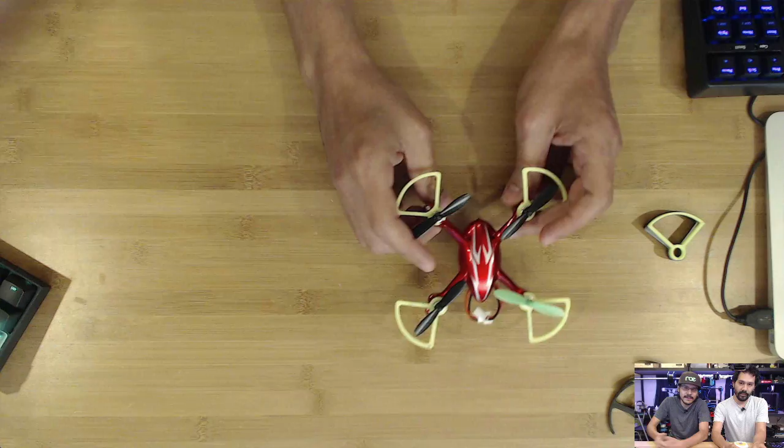Okay, let's start off with what are you prototyping? Pedro, what is this? Last week, you got some drone stuff. This week, update to the drone project. Yeah, so last week we were testing out some prop designs, and we were testing out different filaments to try to achieve nice, rugged, reliable prop guards that were pretty durable and didn't break so easily.

So we started off with the carbon fiber from Proto-Pasta. One of the things that we realized right off the bat was that it was a little bit more brittle than PLA in some cases. Really? A couple of minor crashes really wrecked this. So it actually forced me to redesign the prop guard into something a lot simpler where it's just grabbing onto the motor instead of having this little part here that connects to the bottom. So we cut all that out.

We cut all the fat here where it easily broke, no matter how thick we made the little support here. So we just split that up. We're able to make that a little bit shorter, skinnier, and still maintain the strength.

So we had some XT filament from ColorFabb, which is the copolyester PLA filament. You have to print it at 250 degrees, and it definitely was less brittle than the carbon fiber. It had a little bit more flexibility, but it still managed to break even on crashes that weren't so hard. And it turns out it actually weighed 0.1 grams lighter than the carbon fiber. Oh wow! So the carbon fiber here is reading at 1.1 grams, and the XT stuff is reading at 1 gram.

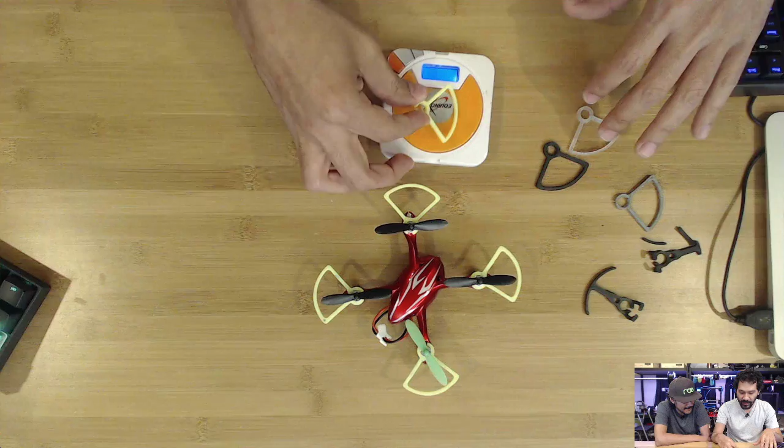And ABS weighs 0.6 grams, so it's almost half the weight of the carbon fiber or the PLA. We were saying last week that about a gram takes about half a minute away. So you're saving about maybe 30 seconds of flight time.

Flight time. So very durable, lighter. The only con here is that you need a heated bed. Yeah, but because of how small this is, it takes about 5-8 minutes to print. And a lot of printers also offer a heated bed upgrade. Oh, okay. You're not completely out of luck. So you might be able to print this on a non-heated bed with, you know, hairspray or a glue stick. So that is the tests on making some durable, lightweight prop guards.

Now take a look at drone. Now tell me a little bit about which printers did you use for these. Somebody was asking if you could print carbon with the Printrbot Metal. Yeah, so all of these were actually printed on the Printrbot Metal. The ABS was actually printed on the Orion Delta printer. Okay, that is one of the better 3D printers that we carry in the shop that do have a heated bed. So it came out really well on that. Just heated it up to 100 degrees on the bed and printed at like 230 degrees. And this came out perfect, no warping.

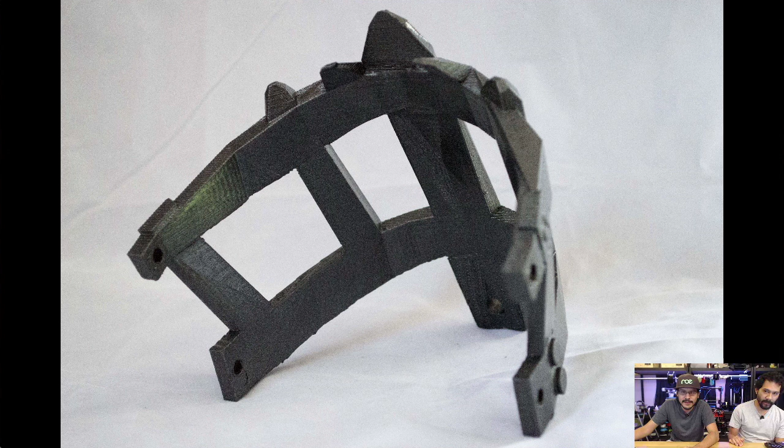That's right. This is from Mad Max. Everybody wants to see this movie. Anybody who's seen the original definitely is looking forward to this one. The folks over at Carry the What designed and printed Max's mask. Yeah, that's right. This is cool. Chris and Cindy, who sell a lot of the open source printable designs on their Etsy shop. Yeah, look at these photos. These are really great. They're using the Rust-Oleum soft flat iron spray paint to get the very metallic look of this cool prop. They're using NinjaFlex as the cord to keep it strapped to their face.

Totally, and this was printed with support material, I'm assuming. And you can download it now on their Thingiverse page. I think they also sell it on Etsy if you don't have a 3D printer. Very nice, simple design. It's a low poly design that works really well for this little prop, and I think it's pretty good. If you look at that, and then a little clipping from the movie, it looks pretty on par. Yeah, it's pretty close. It's like the thing to do now in 3D printing. Any new movie that comes out, make the prop. Build it for real before the movie even comes out. So very awesome. Big ups to you, Carry the What.

Okay. Next up, we got another cool project. This one is the TyPhone. That's right. This is the Hackaday IO project. This is by an awesome 14-year-old maker, Tyler. We don't want to butcher your last name, but I'm going to take a stab at it. Spadginski. So it's basically a 3.5-inch touchscreen. It's got the Adafruit FONA module, 1200 milliamp battery with PowerBoost to do the power, a 5-megapixel camera, and of course Wi-Fi and microphone.

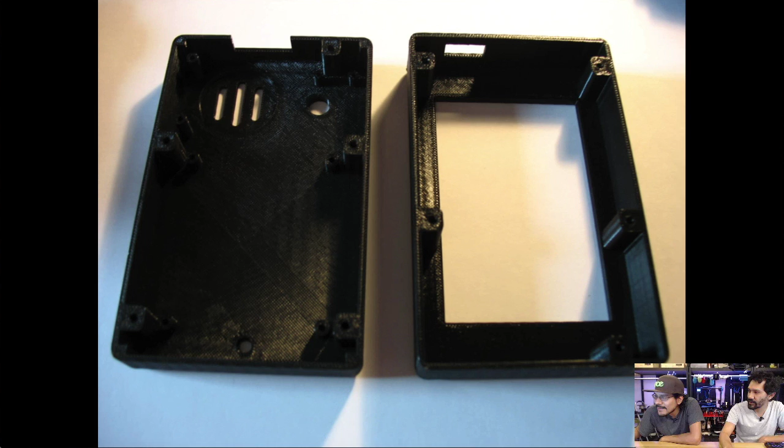Very, very cool. Let me show you guys more photos of it while you tell me some features, Pedro. Yeah, so it's using the 5-megapixel camera that's on the back there. And it's using Phil B's very awesome CamPi project, a modified version of that to run the photo taking app. Got a cool little speaker in there, and you have your microphone in the back there. Very awesome project. Does it make phone calls? Yes, it totally does. Tony D was very excited to print this. He made one for himself for the weekend. Oh, really? Yeah, there's a shout out. There's a lot of awesome FONA stuff coming your way. Totally.

So this is a great project. It is available on Thingiverse, I believe, with the Instructables as well. There is an Instructables page where you can get all the STLs and the step-by-step walkthrough on building your own. Yeah. And it's featured right now on Hackaday IO. Very, very cool. And I think this is a really, really cool project.

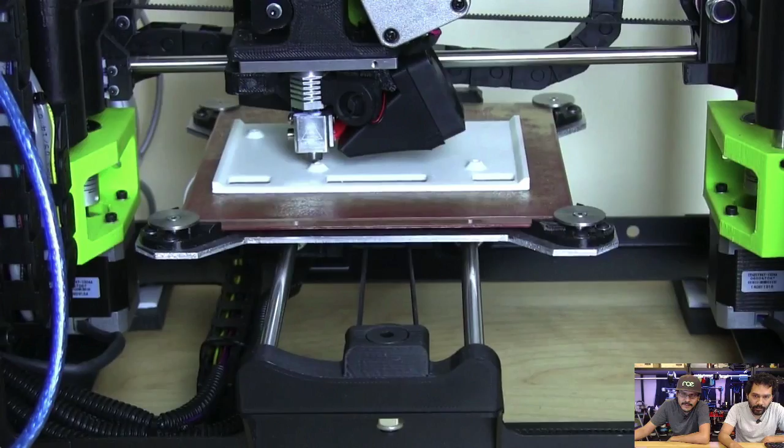This thing moves. A couple weeks ago, he was sorting out the electronics. This week, he's sorting out some Arduino code and figuring out where to mount everything properly. So he's figuring out how he's going to mount it, 3D prints some brackets, and he's taking a look at some components, going with some Adafruit NeoPixels, maybe the Adafruit soundboard to do some sound effects. Very, very cool.

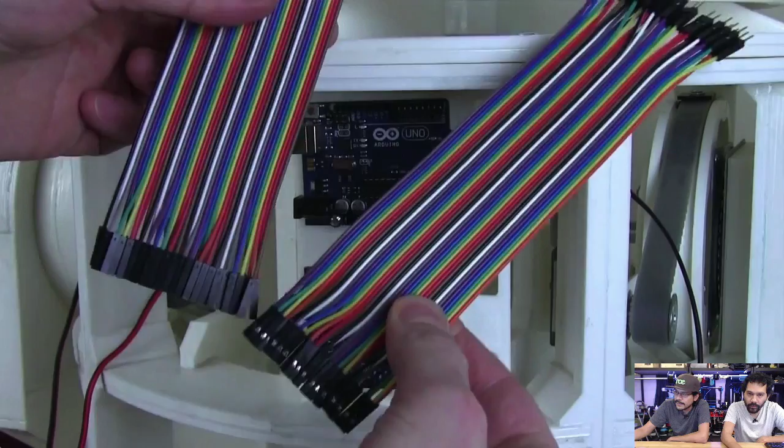Walks us through his Arduino sketch, which is available on his GitHub for free, so you can check that out. He's doing some servo mixing, making sure he's got some constraints so all the values and things work out so that you can turn the right ways. Right now it's a little bit wonky to steer it, but he manages and goes through it all, figures out all the things. He's using a couple different motor drivers to make everything work, and he's sorting out all the wiring and cabling. Very, very fun to watch him do all this.

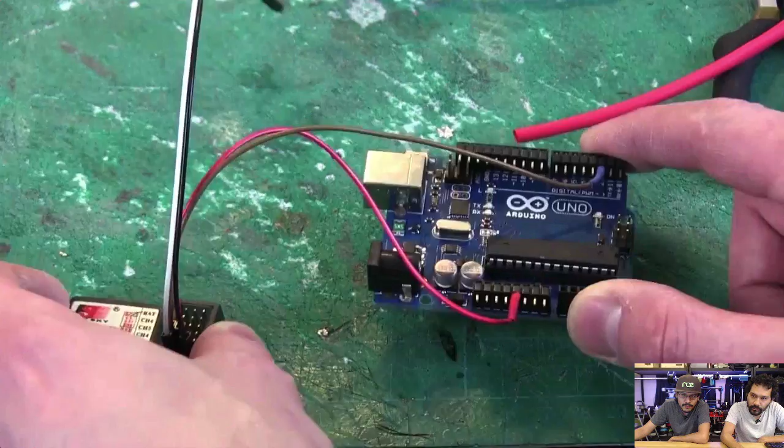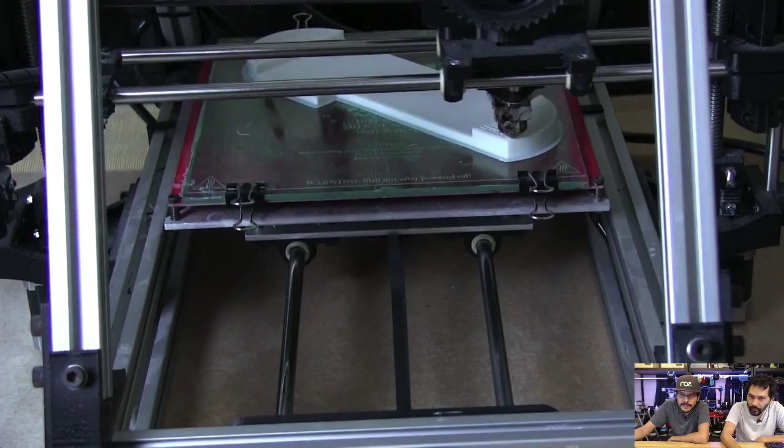This is about a 30-minute video. All of his videos are about that long. Very, very thorough. I love watching this stuff. And you can see he's sorting out more driver stuff. Here it is, figuring out some mounting stuff. I really like the battery box here. He's got a little matrix LED display so you can see the voltage for the batteries. That's a nice touch. More 3D printing. Very, very cool. Definitely check out his YouTube channel to see the whole build.

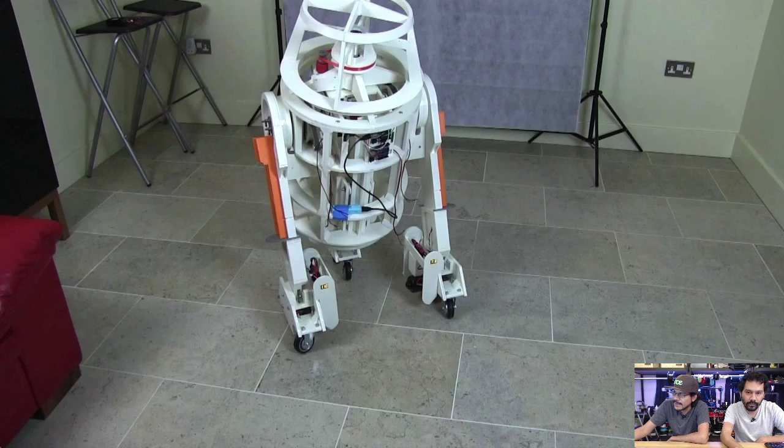Here he is, the finale, driving it around. Very, very good at steering it now. And then goes through some more motor drivers and more code, and then ends the episode off with a little head turn and then spinning around in a circle, just like you would see in a droid. Again, this is fully 3D printed, open source design. You can download it now. Code, he's going through it. Yeah, he's still building through it, all the details and stuff. Very, very cool. Definitely can't wait to see it all finished. It's getting very, very close.

Remember the plan is to keep it all open. He's not going to close it off. It is definitely an open frame design so that you can see all the components in there. It's a work of art that way. You know, it's a shame that everyone else kind of covers it up to make it look like the thing, but very, very cool to see all the electronics. There's going to be a ton of lights in there, a lot of NeoPixels inside. Definitely can't wait for that one to be completed.

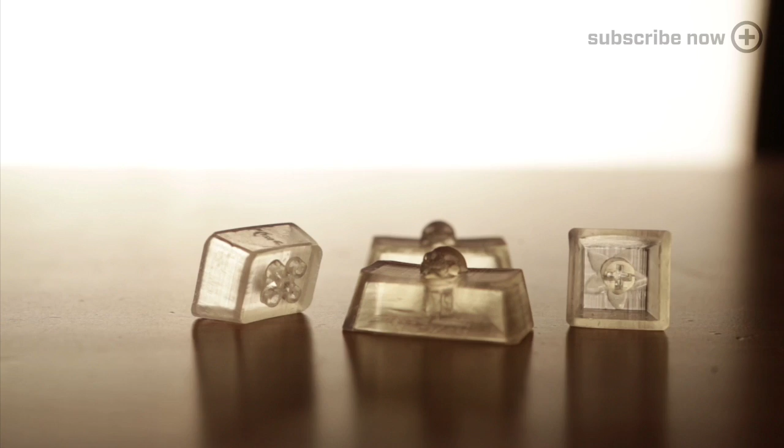It comes with extra keys, which is really nice, but there's a lot of cool stuff we could do by 3D printing our own. These keycaps are held by a connector piece that's in the center of the key, and it just easily snaps on. We made these on the Ember DLP SLA 3D printer from Autodesk, and we printed them in clear resin, which diffuses the LEDs quite nicely.

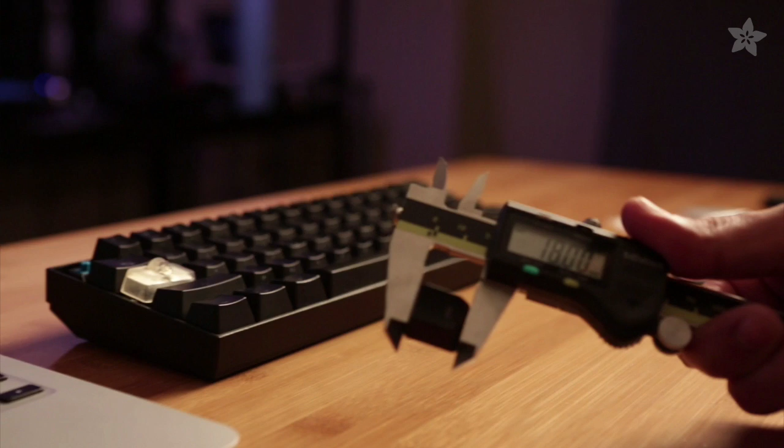Whoa. The size of each keycap is different, so it's important to take note of all the angles and curvatures, because they're kind of all different from each other. So we start by taking measurements of the keycaps using calipers. Then in CAD software, we'll draw up some simple sketches and loft between them to create the basic shape.

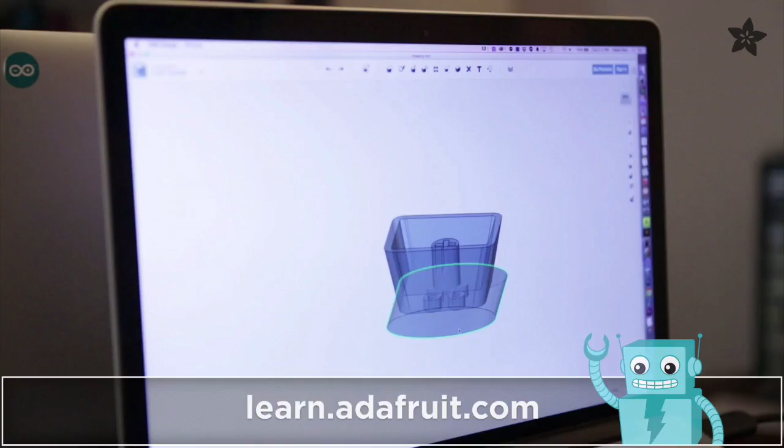We then applied a small fillet of 1.25 millimeters to the edges, and a shell with a wall thickness of 1.25 matches up with the original keycap. To create the curvature, we subtracted an oblong cylinder from the top surface, which is just an easy way to create a slight contour.

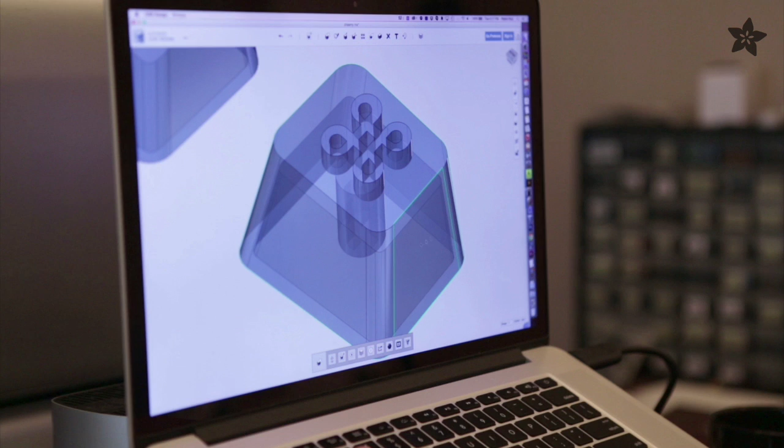Next up, this is the really fun part, because this is where you can make whatever your creativity allows. So we put together these 3 custom keycaps. First up, a skull key with vampire teeth. This is a cool one just to test fine details. A command key with a raised symbol, so that way we can sort of feel for the key and avoid looking down. And then for fun, we made an escape key with a little Adafruit logo on top.

We released the source file so you guys can download it and modify it to make whatever you want. These are rather small objects with some really fine details, so it's probably not going to look so good on an FDM 3D printer, so we think this is a really good job for our resin-based SLA machine.

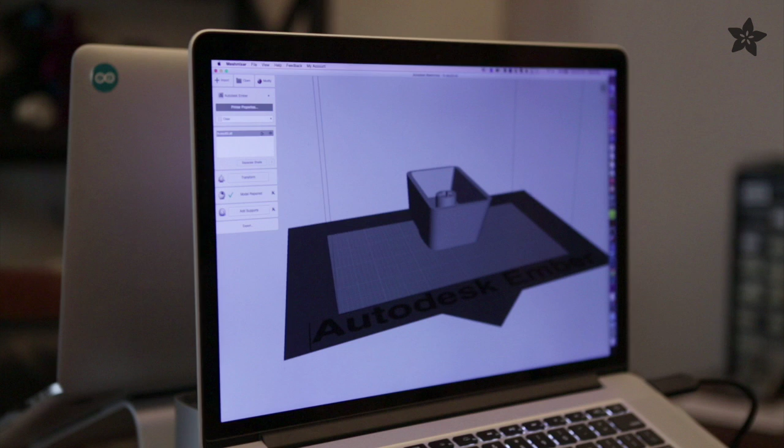To orient the part and add support structures, we're using Meshmixer. We'll lay it flat on the front side, which has a decent amount of surface area, and this will make it so the layers stick to the bed. The default settings for support structures tend to generate non-manifold geometry, especially on really small parts, so we lowered the tip layer option down to 10 to 15, and this will avoid generating any weird geometries when creating supports.

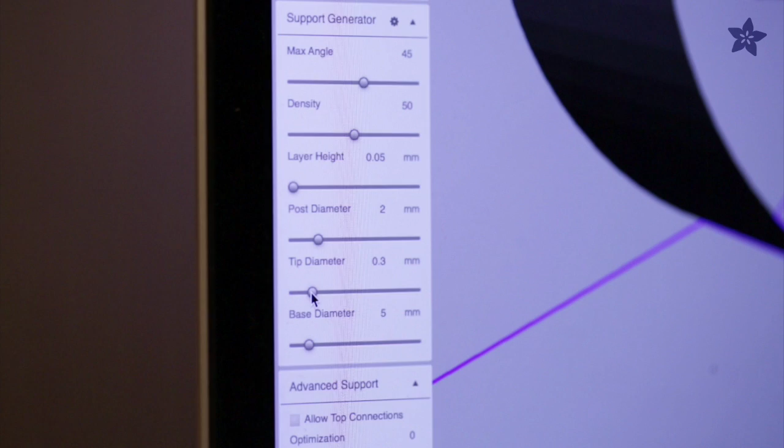We'll also drop the tip diameter to 0.3 millimeters so that it's not so thick. Now when we create support material, they'll come out nice and clean. A few more here on the side of the connector should be enough for it to print properly. Once that's looking good, we'll export the STL and upload it to the printer.

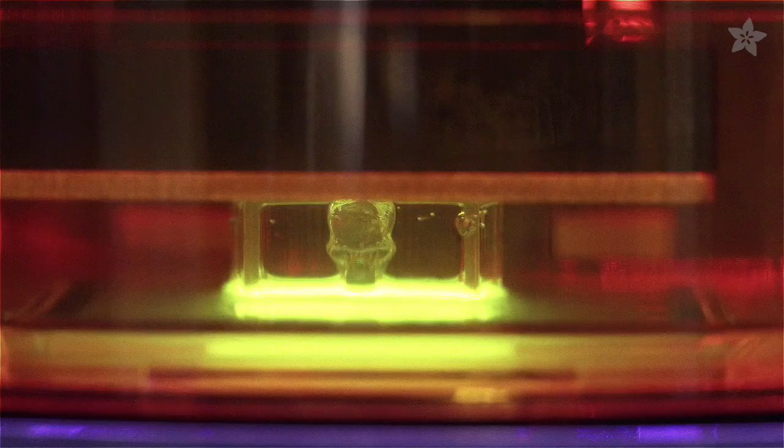So how long does it take to print? We're looking at about 40 minutes to print just one key, and this is at 50 micron resolution. If you drop it down to 25, the print time goes up to about an hour and a half. And there really isn't much difference between the two, and you end up getting similar details.

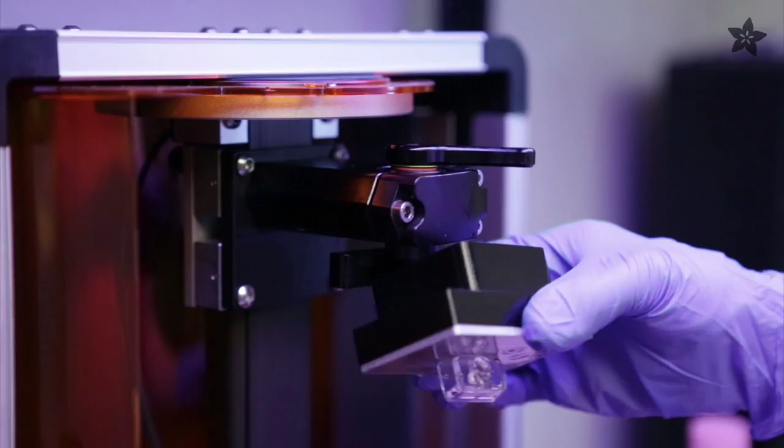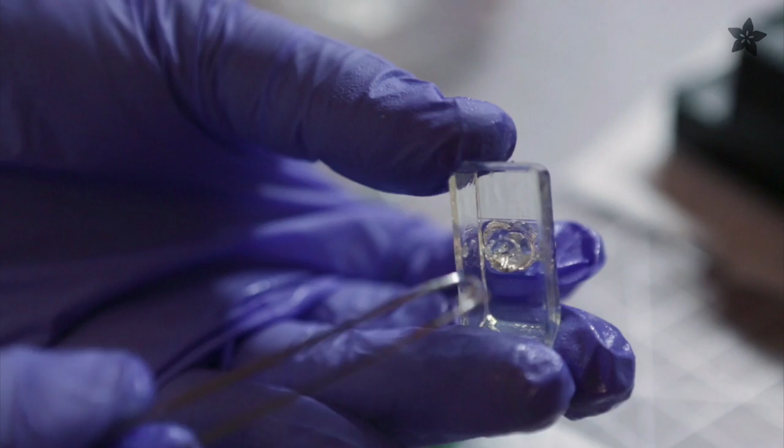Now to remove the print from the bed, we're going to use a flat spatula, and this will just help release the part from the build plate. This one just kind of popped off nicely. To remove the support material, we'll use our Hakko flush snips, and this will help break apart the structures. Tweezers will also help remove the little tiny bits, and then we'll start from the front and sort of work our way towards the back.

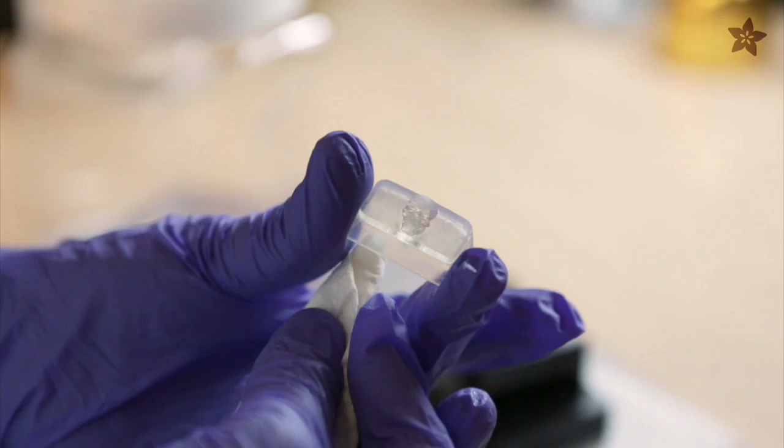To cure the part, we'll pour some alcohol over the keycap, and this will help harden the material, making sure that we get the insides as well. Then we'll pat it down with a paper towel, and we'll let it dry for about 10 minutes so that it fully cures.

How about tolerance testing? Testing for tolerance is always sort of a back and forth process of adjusting thickness to get that snap fit. So it did take a few revisions before getting a solid keycap. But there you have it, custom 3D printed keycaps. We think this would be a pretty interesting accessibility project. Embossed keycaps would work really well for a Braille keyboard, am I right?

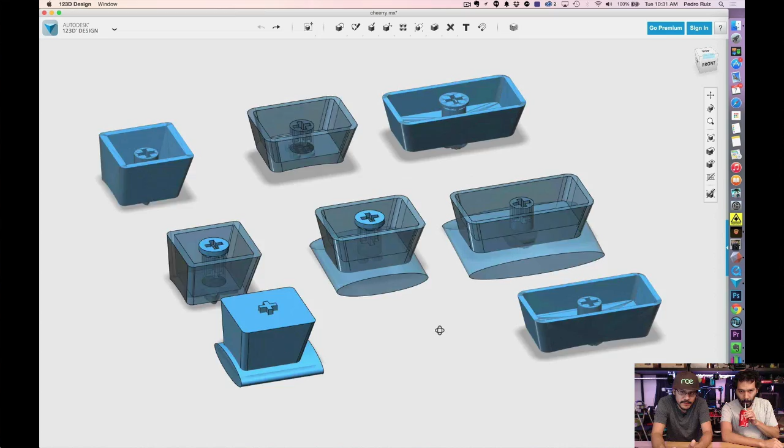All right, we're at the office, or hackerspace. So let's go ahead and check out the layer by layer so we can see how to create our own. Yeah, so when you guys download the 123D file, this is what it's going to look like. We got an assortment of different sizes, different versions. We're going to go through how to create one using the sketches that we included. So they're actually hidden. Right now you can only see the solids and some of the union stuff, and we'll go through that in a little bit.

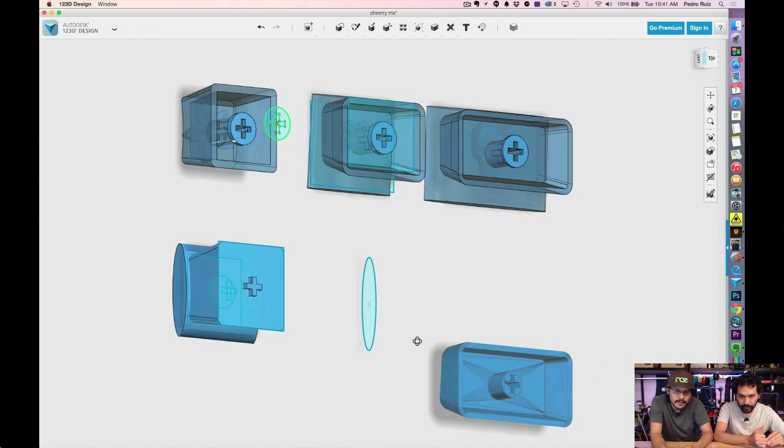What you want to do is go to the sidebar over there, and there's show solids or show sketches. There it is, show sketches, and then that's what you're going to work with. So as we said in the video, the first thing you want to start off with is just pull off the key, take out your calipers, and you're going to want to measure the bottom and the top, and then jump into our file here. And it's simple to edit.

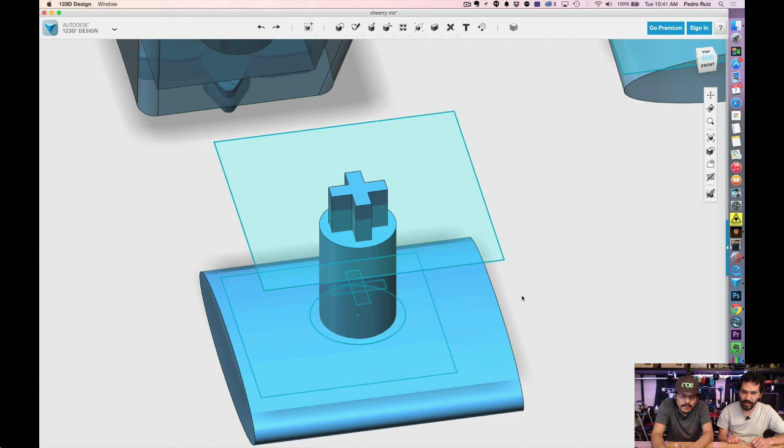You just want to grab these sketches here. You can see the sizes that we use. I think this is the escape key. And you can just simply click and drag these out, and it'll tell you the measurement it updates to. And you just want to do that for the top and the bottom part of the keycap. Once you get all of your correct sizes for the key that you want to edit, you just select one and then shift select the second one and create a loft. As we said in the video, you want to do a shell of 1.25, and the fillet is the same for the corners to create that nice beveled look.

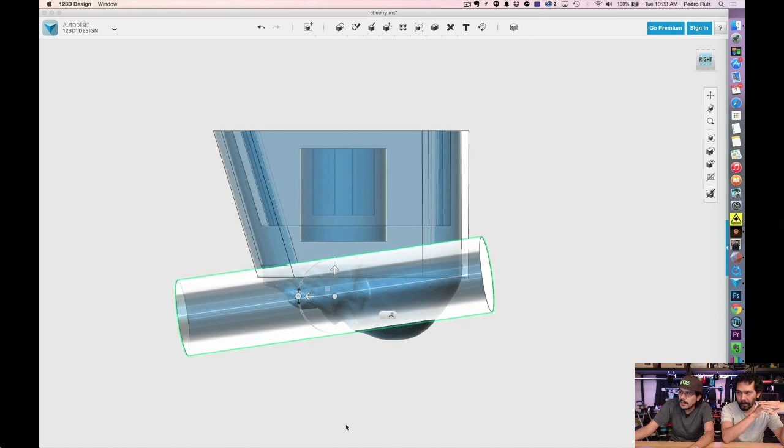Now you're talking about how the curvature tends to be different for the row. This is really something you want to look out for. So you're sort of figuring out which is the right angle. For the little ones, it was 5 degrees when you're rotating it like that, and then 8 degrees on the bigger one. So a little bit more of an elevation. Yeah, so that's just something you want to look out for, what row your key is on, and update that accordingly.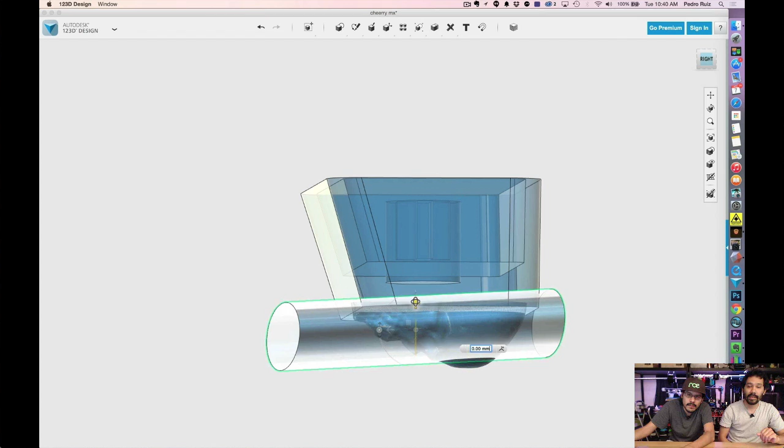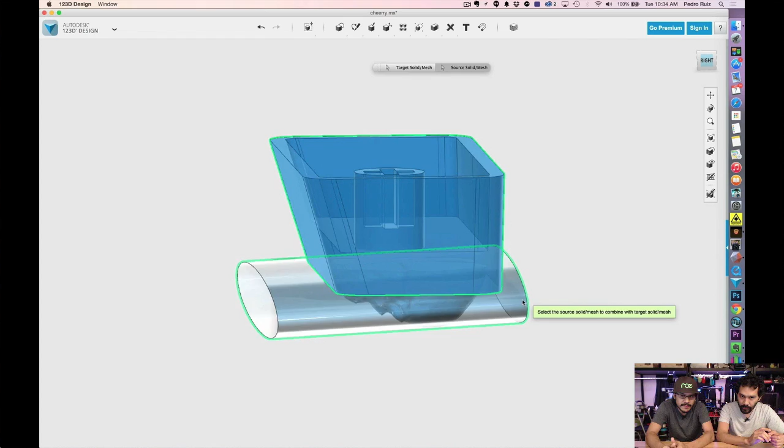The second thing you want to do is make sure that your material is turned on to use the glass material, so you can see through it. And what we're doing here is making sure that the geometry that's going to create the curve is not too close to the bottom wall there, because it is going to create a hole and it's not going to have enough room there. So that's why you have that extra thickness. The top looks a lot thicker than the side wall, so that's just to accommodate for the cutting here. Yeah, so when you cut that out, you can see that it drops down a little bit, and you can see one of the sides actually has less room.

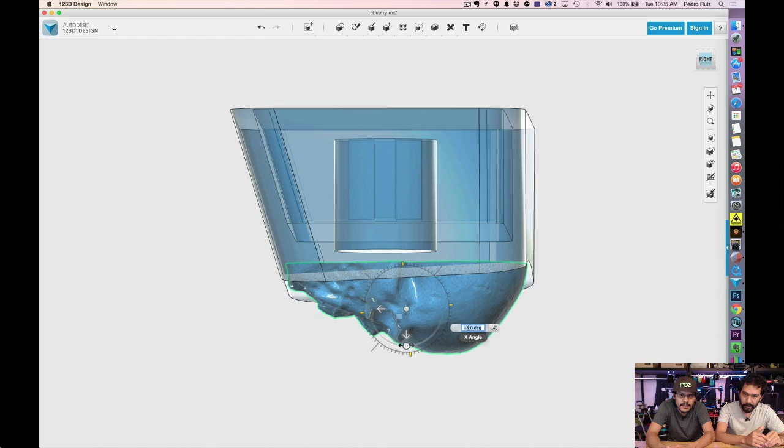Next thing you want to do is, depending on the icon that you want to add, you definitely want to make sure that it is flush up against the newly created curvature. It's not really there yet, so you're pushing it inward to make sure you get a nice intersection, and you'll probably want to do some fine adjustments, increments on the rotation degree, so that it's nice and pretty level with it. Yeah, and you just want to rotate around all the sides and make sure nothing's been moved, everything's still in the middle. It's very easy to move stuff inside of 123D.

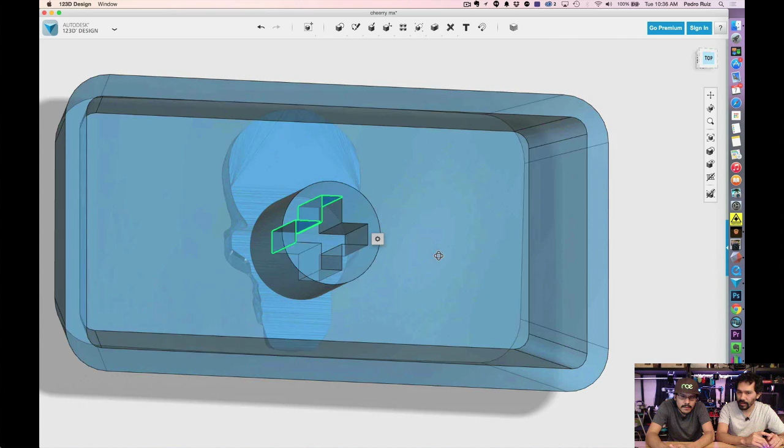For FDM, the next thing you want to do is select all of the walls on the inside, and you're going to want to push these out just a little bit to accommodate for the tolerance differences inside of 123D. So I think about -0.4 is what should have a nice grip and tolerance. As you can see on the sides there, the wall thickness is a little bit too small.

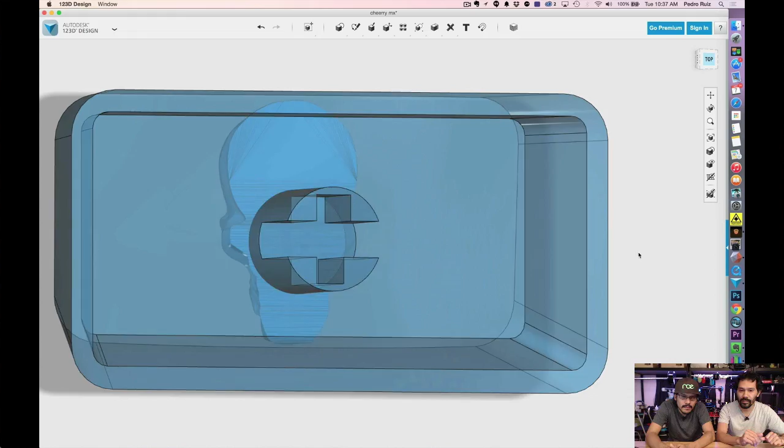When I was printing these out, I figured out the easiest way to do that was just knock those out. You can just select those 2 walls and just stretch them out past, and it'll just create a nice opening for you there, and that should print out pretty good, as you saw in the examples that we showed earlier. Okay. How about support material?

It's coming up. Support material, yeah. So the only thing that you need for support material is the bottom there. So what you want to do is look inside the file. There is a little bottom cylinder. Well, let's go in order here. I think you're merging first. Oh, so tell me about merging. Yeah, tell me about merging a mesh and a solid.

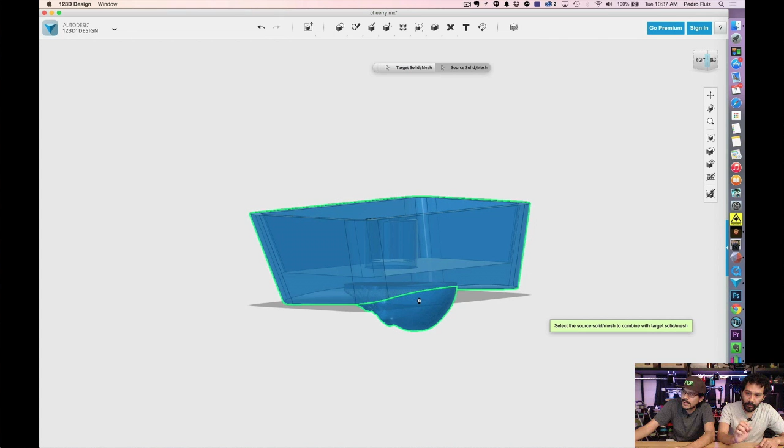Yeah, so the skull is an imported STL, which is a mesh, and when you do a combine with a solid object and a mesh object, it's going to turn the solid into a mesh. That's right. Which means that it's going to triangulate it. Right. It's no longer editable. So you're going to lose the ability to edit your fillets, your faces, your vertices.

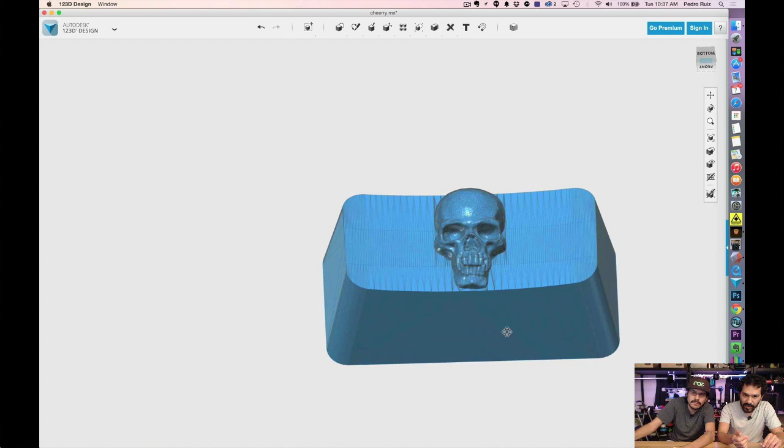Okay. That's actually a question that somebody asked on YouTube, and that's why you're not able to edit any of that. It's because it turns it into a mesh. And so you want to be sure that you have most of your edits finalized, because you're not going to be able to move any of your walls. That's why I have so many files in there. It's just a duplicate of something before I do a union on it.

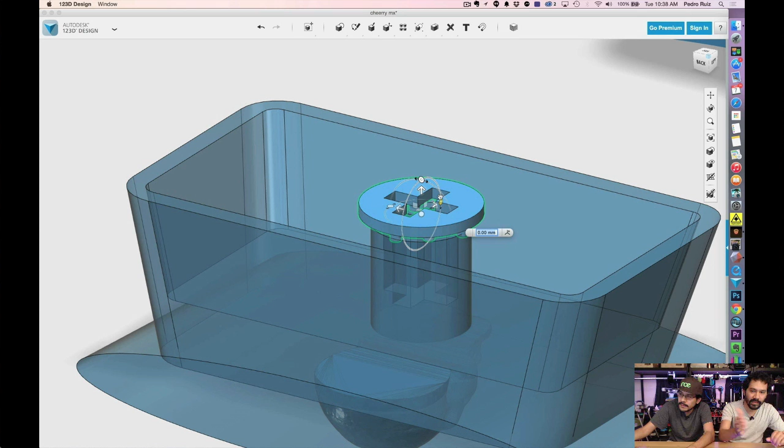Okay. So you were talking about support material. Here it is, included inside of the file. If you just show all objects, this is in here. You just make a copy of it, duplicate it, and then snap the bottom of that to the top of the key stem there. Oh, okay. So it'll just align and snap to the bottom there. And then you just do a merge on that, and you can see that it turns into a mesh again. Everything turns into a mesh there.

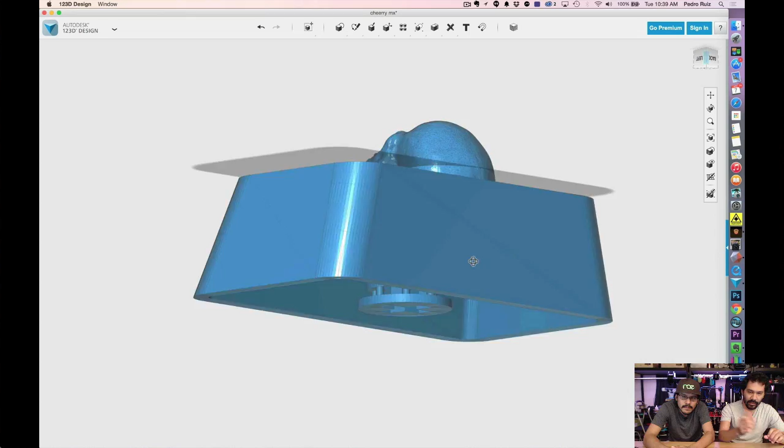Okay. And the way you're going to print this is flat like this. The little support structure is going to support the key stem up there, and you should be good. I'm going to do this at 100 microns, 150 microns. Otherwise, if you do it at 200 microns, you're going to see a lot of ridges that show up. Okay. So again, this is the 3 keycaps that we came up with. Should be useful. I know I should have made like the W, A, S and D keys, but I switched over to the big one, so I have the keys over here.

You don't do too much with arrows, right. I mean, it started off as a necessity, like, hey, I really need to change my muscle memory after 20 years of being in the same spot. Yeah. You're gonna need a little bit of help. So I think this is a really cool combination of I want to do something cool, test the Ember printer, test the LP, and check out this project. Colin came up with a really good project idea. Like, why hasn't anyone done this before? Yeah, people are doing it, but not on these printers.

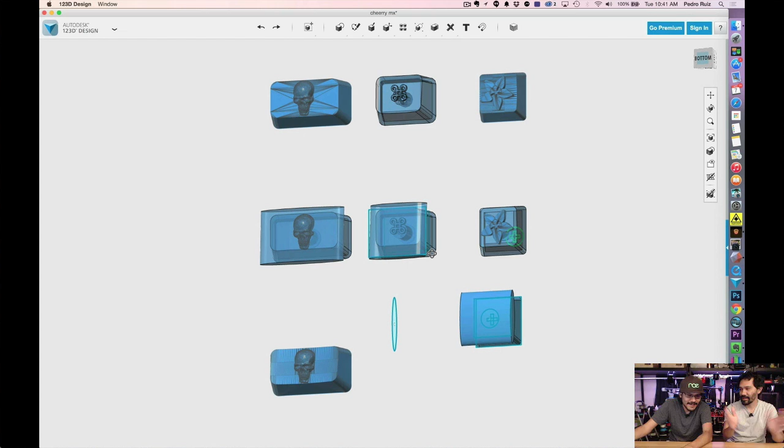So yeah, that's all. The 123D file, STLs, you can get them all at learn.adafruit.com, step-by-step guide on measuring, like we were just talking about, the support material, making manifold inside Meshmixer, all that stuff is in the guide. I like that you also made it for FDM.